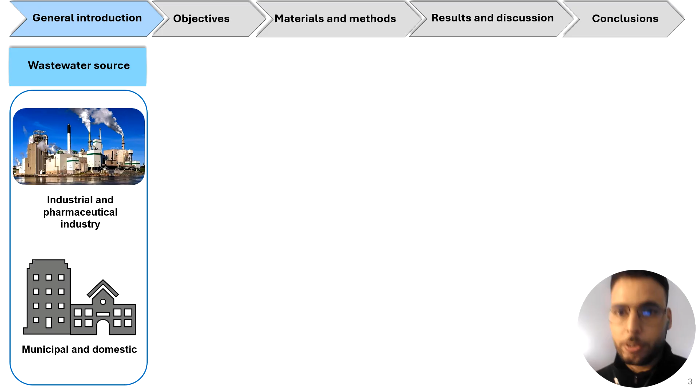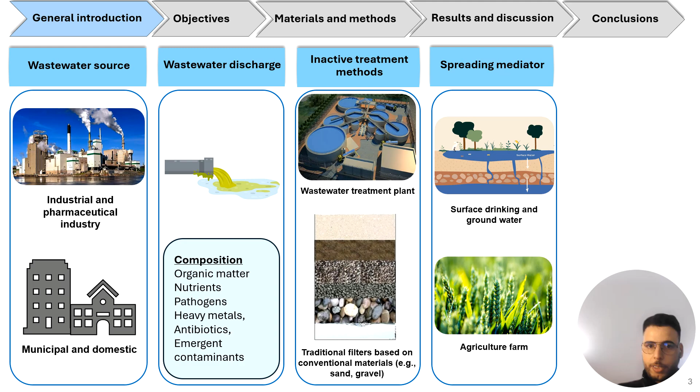As you know, the world is concerned about environmental pollutants resulting from industrial, pharmaceutical, and domestic activities, which contain a mix of various pollutants such as organic matter, nutrients, pathogens, heavy metals, antibiotics, and emergent contaminants. However, the traditional treatment approach that relies on conventional materials such as gravel or sand often fails to completely remove these contaminants, allowing their spread into surface, drinking and groundwater as well as agricultural areas.

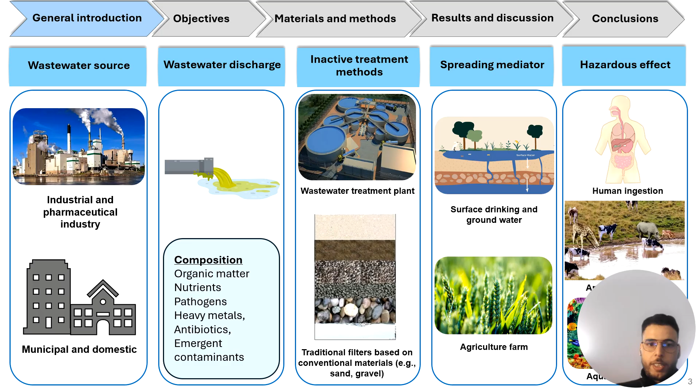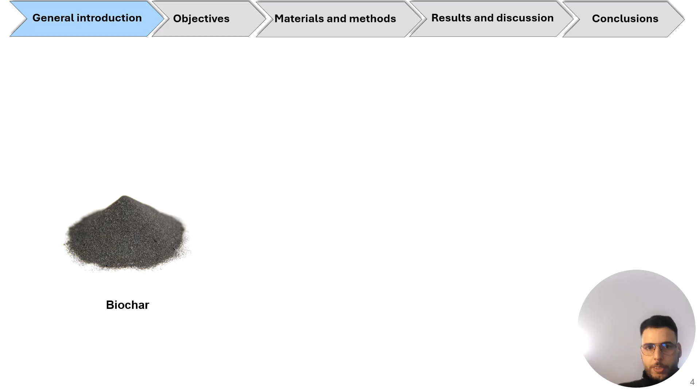This can lead to serious harmful effects on humans, animals and aquatic ecosystems, thereby highlighting the need for a sustainable and low-cost solution that supports both energy recovery and effective water treatment. Furthermore, the main objectives of sustainable development are to ensure access to water and to reduce environmental waste. An innovative dual approach combines the recycling of agricultural waste and its conversion into biochar for use as an adsorbent to treat wastewater. That creates a circular system supporting resource conservation and environmental sustainability.

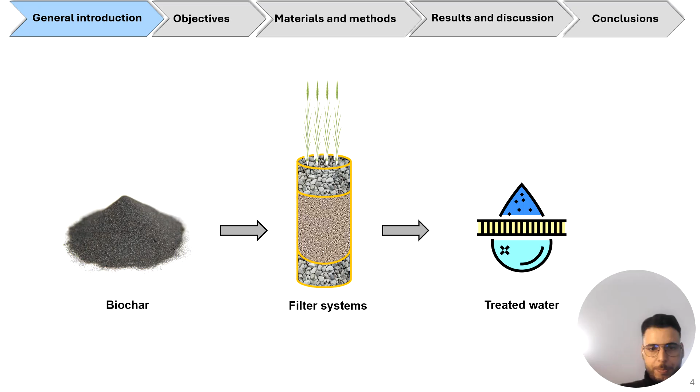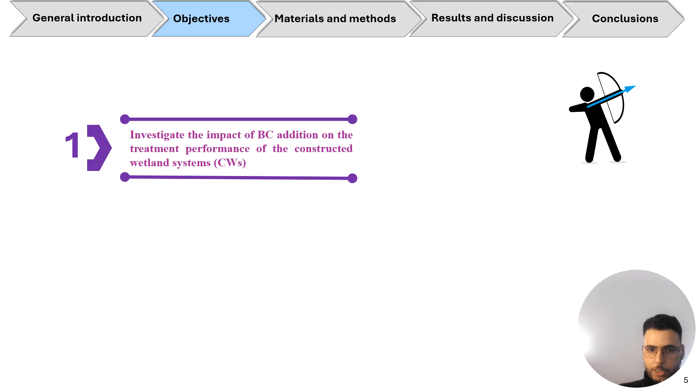So based on that, the present study was conducted to optimize the treatment efficiency in constructed wetlands by investigating the impact of biochar addition on the treatment performance of the constructed wetland, then explore the effect of increasing the organic loading rate on the treatment capacity of the constructed wetland.

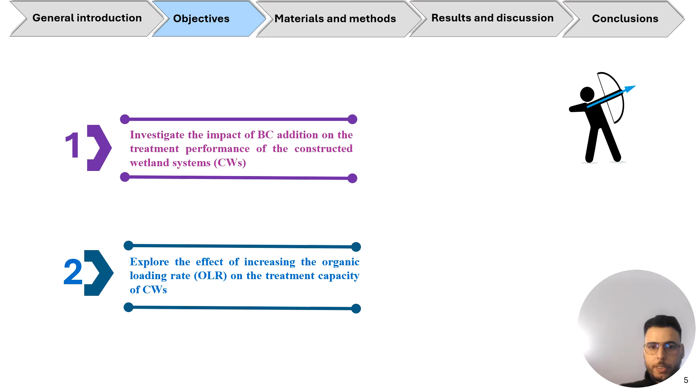Now let's move to materials and method. The present experiment was conducted with two constructed wetlands with identical characteristics except the filtration bed of the constructed wetland with biochar, which was filled with 10% biochar plus the rest with sand, instead of 100% sand for the control system CWC.

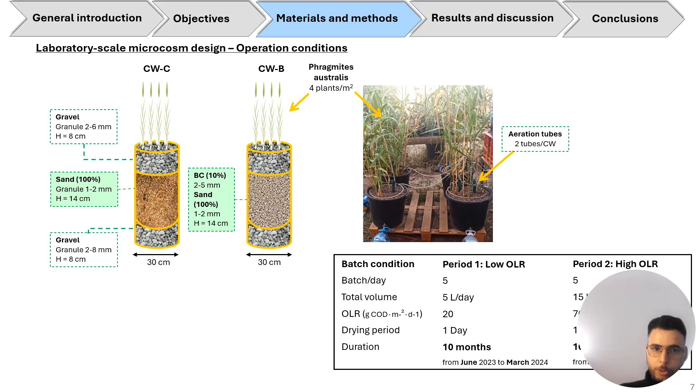The experimental period was divided into two distinct phases based on the organic loading rate. The low organic loading rate was 20 grams COD per meter square per day, which operated with the sequential batch fill and rest mode with 5 batches per day and a total influent volume of 5 liters per day, in combination with a 1 day drying period. However, the high organic loading maintained the same conditions except the total influent volume, which was 15 liters per day.

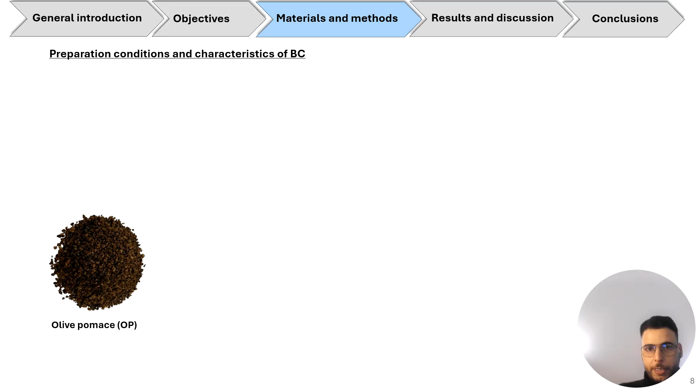The biochar used in this experiment was produced from olive pomace using a tubular furnace at 590 degrees for a contact time of 2 hours and a heating rate of 10 degrees per minute, producing biochar with properties that meet the parameters specified in the European standard for water treatment.

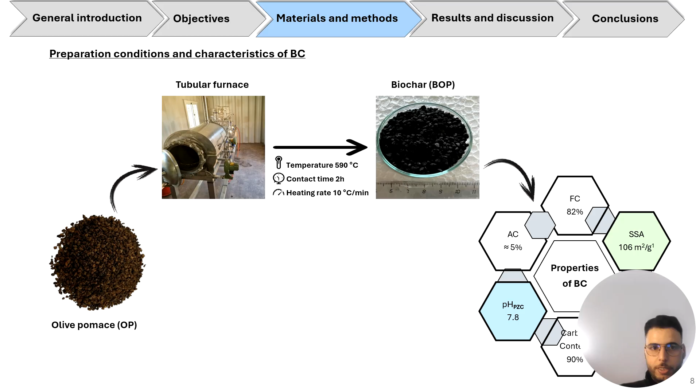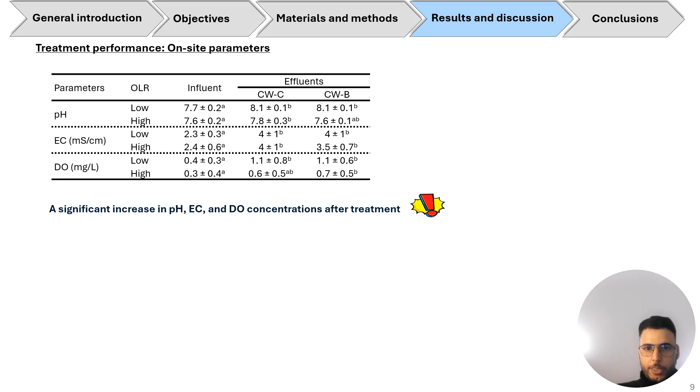Now let's look at the results, starting with the onsite parameters. Regardless of the organic loading rate, we observe an increase in the pH, electrical conductivity, and dissolved oxygen after treatment. That can be explained by biological oxidation, dilution of the carbonate salts from the bed and the strong hydrogen exchange capacity of the substrate. The increase in the electrical conductivity mainly came from the oxidation of the organic compounds during the treatment, and the batch feeding mode also played a role.

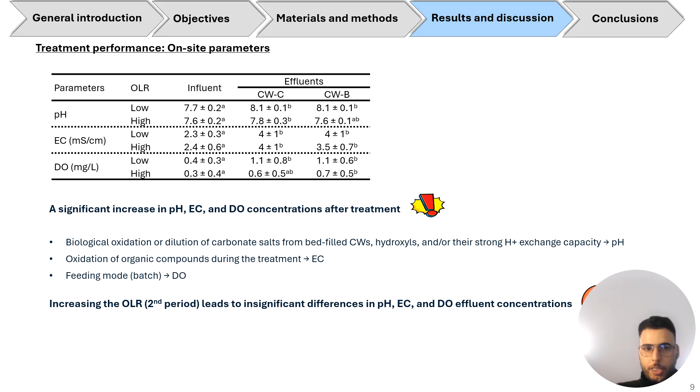However, when the organic loading rate was increased, the change in the pH, electrical conductivity and dissolved oxygen became insignificant, likely because the higher feeding volume reduced the contact time between the effluent and the substrate.

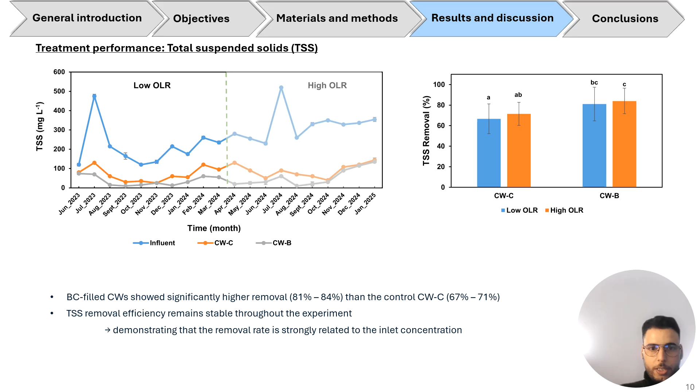As for the total suspended solids, the system performed very well, regardless of the organic loading rate or the type of media used in the filter. We observe a strong reduction in the TSS concentration through the whole experiment. The constructed wetland with biochar consistently showed a lower TSS concentration compared with the control, even when the high organic loading rate was applied. The TSS removal efficiency remains stable. That means the removal rate is more closely related to the inlet concentration rather than the loading rate itself.

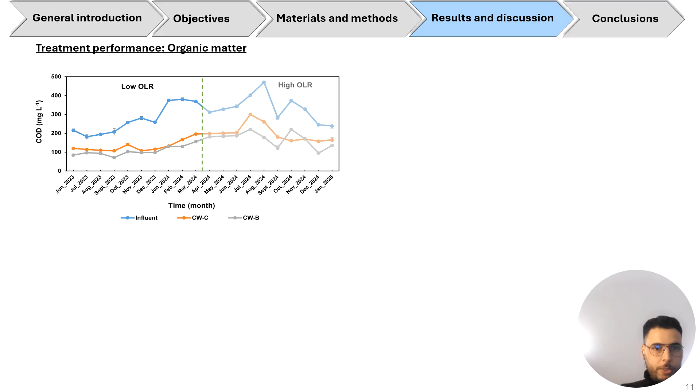Moving to the chemical oxygen demand, COD, we also observe a significant decrease in the concentration after treatment, regardless of the operating condition. The COD evolution follows three distinct phases: an initial lag phase with limited biomass activity, secondly, the adaptation phase with improved performance, and finally, the high organic loading phase where efficiency slightly dropped due to the high organic inputs.

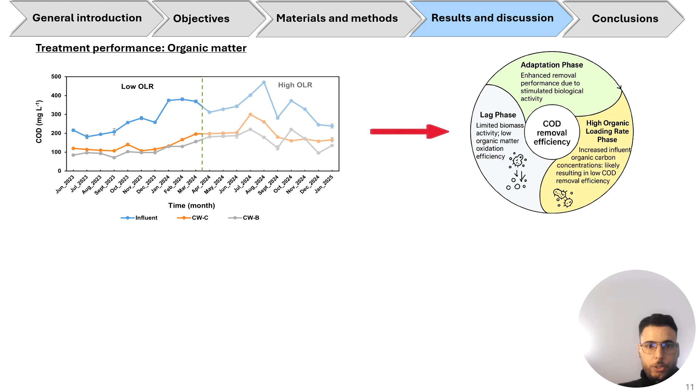Throughout this study, the biochar-based constructed wetland again performed better than the constructed wetland without biochar, thanks to biochar properties such as the porous structure and surface functionalization, which enhance organic matter adsorption and create a favorable environment for microbial degradation.

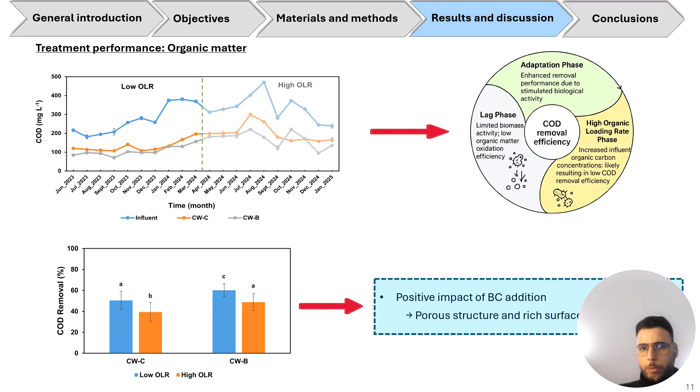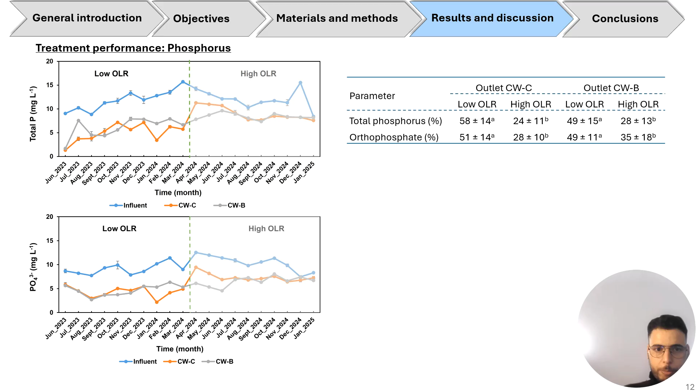In general, the biochar showed limited effectiveness in phosphorus removal due to its surface properties, such as low affinity and negative surface charge.

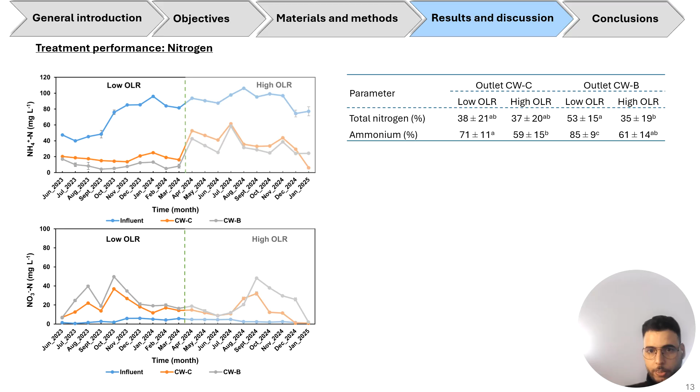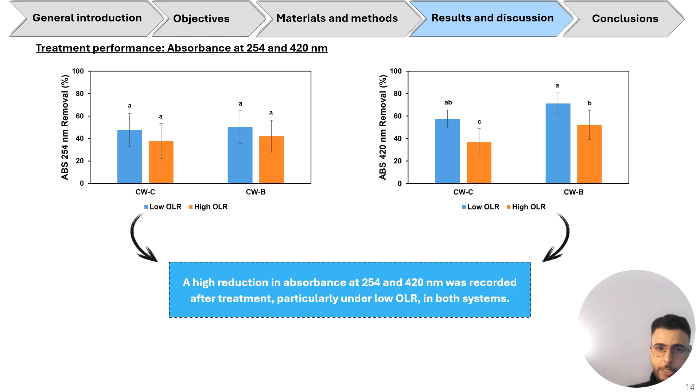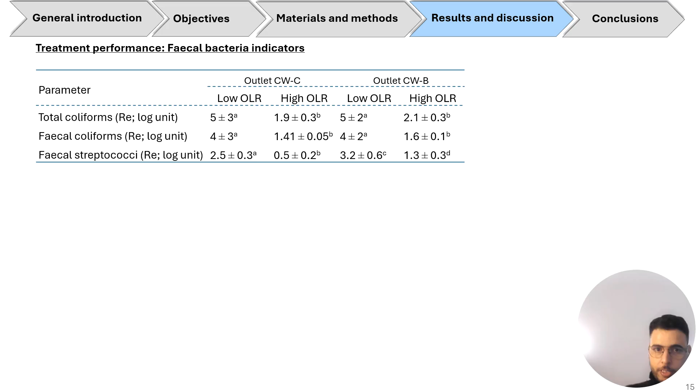Moving to the last slide before the conclusion, the microbiological indicators and statistical analysis reveal a clear reduction in the total coliforms, fecal coliforms, and fecal streptococci after treatment, especially under low organic loading conditions.

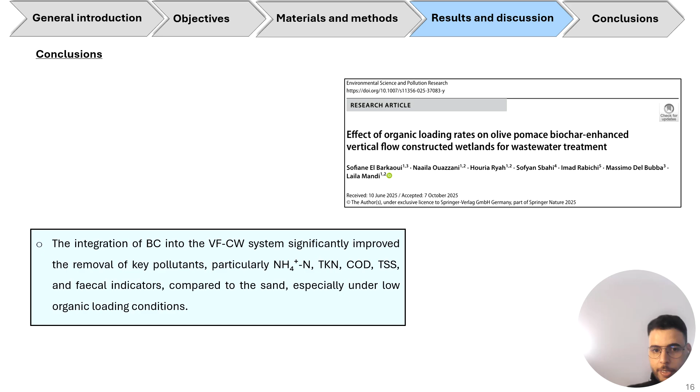As a conclusion, the integration of biochar into vertical flow constructed wetlands significantly improves the removal of key pollutants, particularly ammonium, total Kjeldahl nitrogen, COD, total suspended solids and fecal indicators compared to sand, especially under low organic loading.